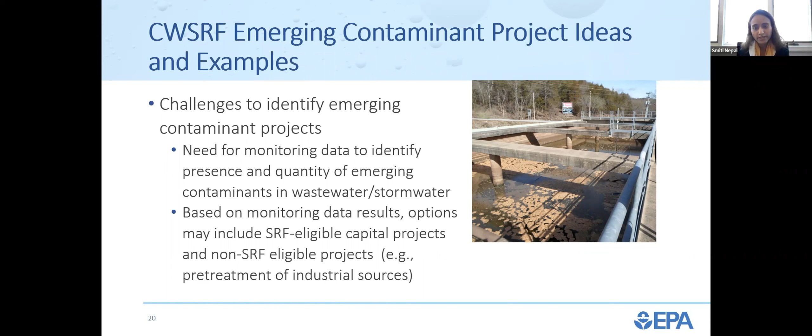The next few slides are meant to provide some practical project ideas and examples in identifying eligible projects for funding. We will also discuss means for addressing current limitations related to monitoring and planning.

Here are some high-level considerations when looking for projects that are Clean Water SRF Emerging Contaminant Fund eligible: monitoring as part of projects for planning and design. For example, your wastewater characterization for POTWs may be eligible.

Consider projects that are already in the pipeline that address emerging contaminants, and look beyond POTW construction and PFAS to stormwater, landfills, and contaminated sites, which can also be a significant source of emerging contaminants.

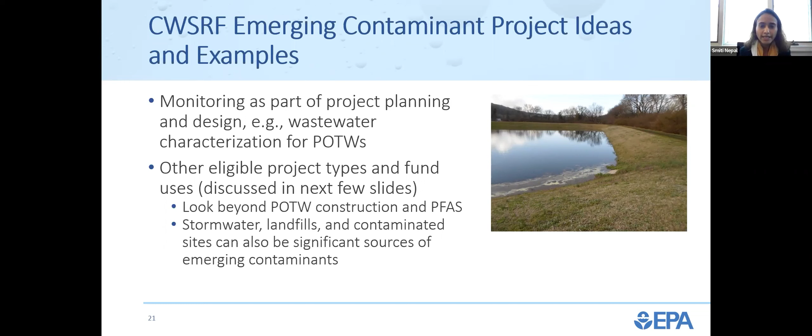Provided that there is a reasonable expectation that the planning will result in a capital project, planning and design and water quality planning, such as your stormwater management plan that results in BMPs, may be eligible. Funding can be used for pre-construction activities to help prepare planning, preliminary engineering, and alternative analysis documents.

Again, monitoring is eligible for the specific purpose of project development. These include the planning, design, and construction mentioned earlier. There are built-in flexibilities when it comes to monitoring for the specific purpose of project development over a reasonable time frame, because we understand the time frame may be different depending on the contaminant you're looking at, the location, or may be affected by seasonal variation.

After the monitoring is completed, the outcomes may be other than a capital project that addresses the emerging contaminants. We won't know until that monitoring is completed.

Another thing to note is that funding may also be used for certain project types to assess effectiveness after construction. An example would be non-point source projects and green infrastructure projects - the startup period to assess effectiveness of the technology may be eligible, and states can determine what is a reasonable startup period.

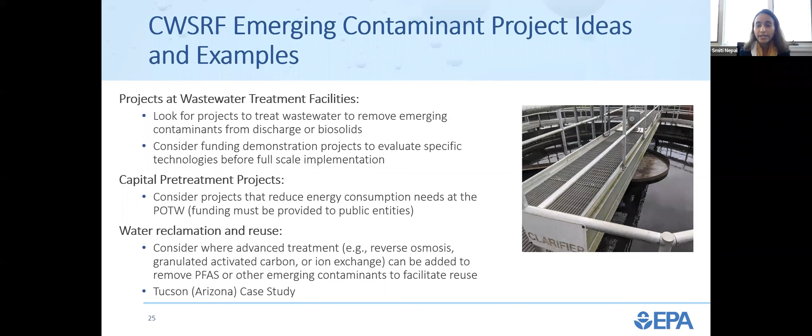Next slide, thank you. Moving away from POTWs, landfill projects may be eligible, especially if they address emerging contaminant runoff. So for example, capping projects that address runoff from the landfill cells, and leachate collection and treatment that will reduce PFAS runoff or load to the POTW.

The emerging contaminant funds are also available for construction of new publicly owned landfills, whether local or regional, or a modification or expansion of existing ones. So for example, adding a dedicated cell for PFAS contaminant waste. We also have an example on this. Beth Malcolm with New Hampshire Department of Environmental Services will be presenting a landfill case study that will be using the EC, Emerging Contaminant Funds.

So we have covered some potential eligible projects in POTWs and landfills, but there is more this fund may be used for, such as brownfields, Superfund sites, and sites of current or former above ground or underground storage tanks. The actual projects may include addressing PFAS through capping, in situ treatment, or removal of contaminated material as part of the implementation of a state non-point source management plan.

Another area to look into is surface water protection and restoration, where there may be projects that address emerging contaminants in water bodies. So for example, these funds may cover equipment for the physical or chemical removal of harmful algal blooms, or HABs. And HABs removal could include strategically placing aeration blowers to remove and control algal blooms, or flocculant-based methods to facilitate algal removal. Next slide, please.

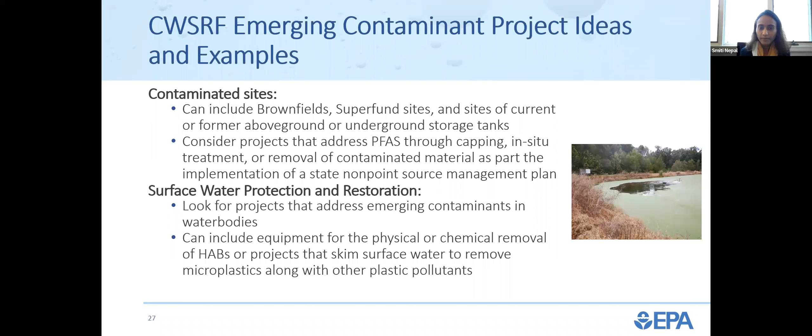Another area that is eligible is non-point source projects. These may be publicly or privately owned, provided that they are capital projects that support the implementation of a current EPA-approved state non-point source management program, or 9-element watershed-based plan established under Section 319 of the Clean Water Act. An example project will be presented by Lori Johnson of Oklahoma Water Resources Board, where she'll be talking about the Lake Thunderbird project.

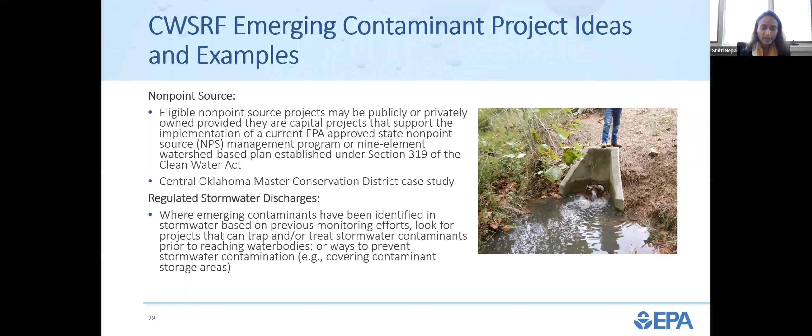And under regulated stormwater discharges, where emerging contaminants have been identified in stormwater based on previous monitoring efforts, look for projects that can trap or treat stormwater contaminants prior to reaching water bodies, or some kind of containment systems, such as covering contaminant storage areas. So this brings us to the next portion of our presentation, where Heather Strathearn will cover the latest research on treatment technologies. Thank you. Heather?

Thank you, Smriti, for sharing that great information on project ideas and examples of eligibility. Like Smriti said, building on these project ideas, we want to share with you all some research on treatment technologies that might be applicable to these projects, particularly demonstration projects. And we're hoping to equip you all with the information and resources necessary to have projects that are successful in addressing these emerging contaminants.

Before I get started, I do want to note that this is preliminary information, and we're focusing today specifically on per- and polyfluoroalkyl substances, known as PFAS, microplastics, as well as pharmaceutical and personal care products, known as PPCPs. We recognize that more information is needed in these areas, and this is in no way exhaustive, and we'll continue to make additional information available.

We also recognize that there's a lot of work being done in this area, so please do reach out to us if you have additional research that you'd like to share. And additionally, there's a great opportunity for pilots that are funded through CWSRF Emerging Contaminants to share information back to EPA regarding their treatment effectiveness, and we'd highly encourage folks to stay connected with us.

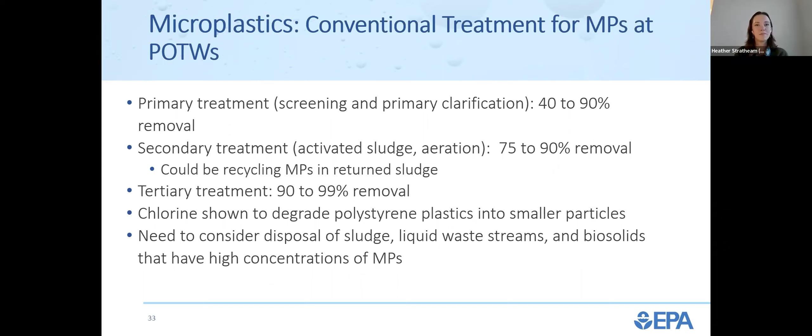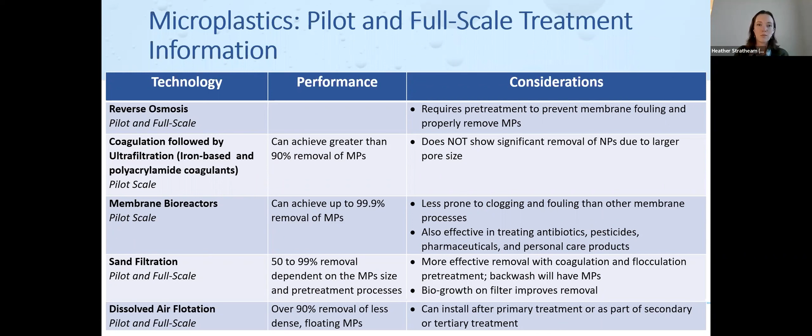This differs from membrane bioreactors in the middle of this slide, which are less prone to fouling than other membrane processes due to the biodegradation of the plastics that's occurring in the biological treatment process prior to the membrane. And so with any treatment process, it's important to consider the waste stream with microplastics and what the ultimate disposal will be. Next slide, please.

Okay, lastly, looking at pharmaceuticals and personal care products, also known as PPCPs, which include all drugs, both prescription and over-the-counter medications, as well as non-medicinal consumer chemicals, such as fragrances and lotions and soaps, and ultraviolet filters and sunscreens. So PPCPs have many pathways and sources to enter into a wastewater system, and testing is really difficult, partially due to the large number of compounds. EPA has developed a method that covers 74 of the compounds.

And another important consideration and area of focused research in PPCPs is the development of antimicrobial resistance, either within the treatment system or being propagated in the environment from antibiotics that are in the effluent.

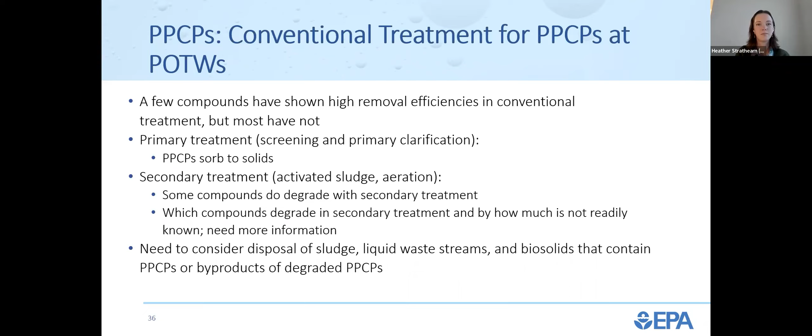And so with any of these treatment processes, it's really important to consider the chemical composition of the free radicals that are created and the remaining PPCPs in the waste stream that's produced and what the ultimate disposal of that waste stream will be.

So I'll conclude just by recognizing that this was a lot of information presented very quickly. So please do go through the linked references and the additional resources for more information. And I'll also emphasize that this is only preliminary information on treatment technologies that might be relevant to you all, particularly for demonstration projects. And the focus of this presentation is on CWSRF emerging contaminant eligibility. So if you have questions about specific technologies, we would love to speak with you offline about that.

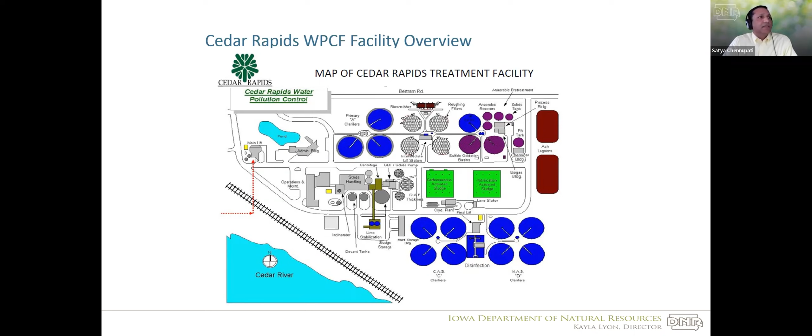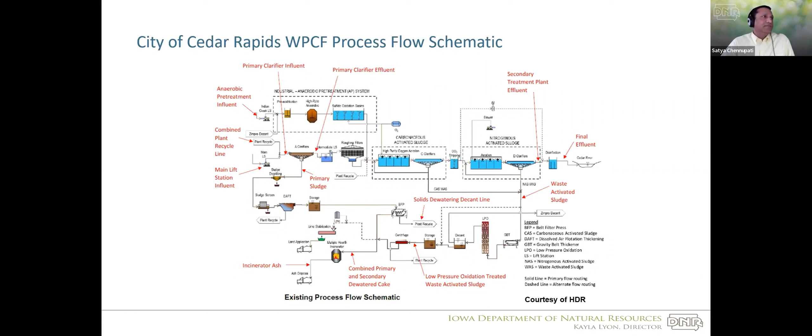And here is just a process flow schematic of the water pollution control facility. I'm not going to dwell too much. It's a little busy there. I just want to point out that incinerator on the lower left-hand corner. That's where the incinerator process is for handling solids. Next slide, please.

So back to the PFAS source and treatability study that is currently underway or going to be underway. The study is divided into 4 separate and discrete tasks. Task 1 is the baseline sampling and analysis of PFAS components. The second is the evaluation of available alternative treatment technologies that are commercially viable for both solid and liquid streams based on the monitoring results. Third is the bench scale and pilot scale testing of a few of these options, to make final recommendations, that is task 4, in a final engineering report with sizing, layouts, and budgets.

So we talked about task 1, the sampling and monitoring and analysis. The first slide here is about the liquid stream. As you can see, they're wanting to monitor the main lift station influent coming in, anaerobic pretreatment influent, primary clarifier influent and effluent, secondary effluent, final effluent, solids dewatering decant lines, and the plant recycle lines.

On the solid sampling, as you can see, the primary sludge, waste activated sludge, and then the low pressure oxidation treated waste activated sludge, the primary and secondary dewatered cakes, that's through the gravity belt thickener and the belt filter press, and the incinerator ash off of the multiple hearth incinerator.

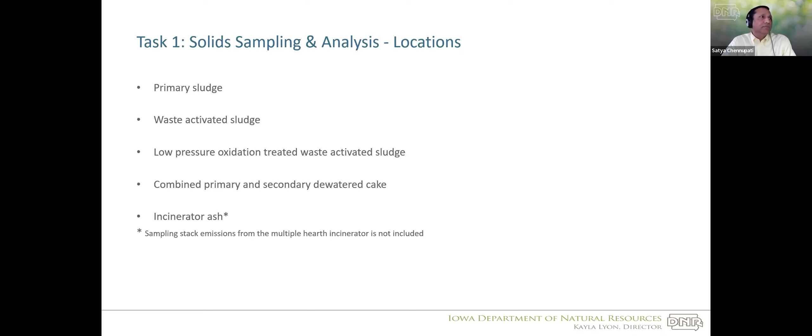So we're talking about the Clean Water SRF project and funding eligibility. Currently the city has requested CWSRF emerging contaminant funds to support this project. Is it Clean Water SRF eligible? Yes, because there is a capital project at the POTW under the section 212 treatment works eligibility and under section 603C1 of the Clean Water Act.

Are emerging contaminants present? Yes, because they are already detected in the EPA research study in the biosolids. Has the capital project been identified? Yes, because the monitoring and pilot projects most likely will result in a capital project to remove and/or eliminate PFAS from the solids and/or the liquid streams.

So where are we at in the entire process steps here? The city has submitted a CWSRF intended use plan application along with a report to the Iowa DNR by December 1st. We are currently processing the IUP applications, scoring, publishing a project priority list, and it'll go through EPA review as well.

And finally, it needs to be approved by our Environmental Protection Commission. We are going to notify the city of Cedar Rapids about the project eligibility for the emerging contaminants funding. Then once the IUP is finalized, we need to apply for the emerging contaminant supplemental grant to EPA, and we need to receive that.

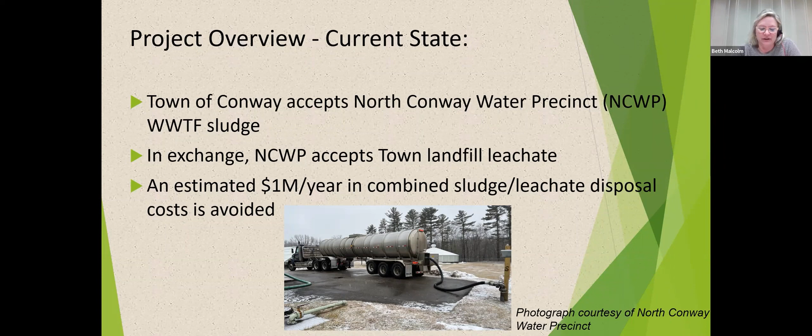So for the project overview, the current state is that the town of Conway landfill accepts the North Conway Water Precinct wastewater treatment facility sludge. In exchange, North Conway Water Precinct accepts town landfill leachate. An estimated $1 million in combined sludge and leachate disposal costs is avoided per year through this partnership. Next slide, please.

The complication is that North Conway Water Precinct's treatment facility is a groundwater discharge facility subject to AGQS standards for emerging contaminants such as PFAS. At least one of the monitoring wells currently exceeds the regulatory limits. And preliminary testing indicates the majority of PFAS loading at the wastewater treatment facility is from the town landfill leachate. Next slide, please.

So the goal of this project is to investigate the feasibility of PFAS treatment options for the landfill leachate stream. They wish to pilot test and select a recommended alternative and then prepare the project for full design, voter approval, and construction. Next slide, please.

So we are currently developing our EC program goals and reviewing the guidance available. We hope some potential recipients were able to join today's webinar, and we are reaching out to wastewater treatment facilities receiving landfill leachate discharge. I'd like to point out that New Hampshire plans to offer Clean Water SRF grants for EC projects. Municipalities will not need the authority to borrow for loans under this program. The typical town meeting vote of the governing body will not be necessary; however, communities will need the authority to accept and expend grant funds.

So coming up in the spring of 2023, we will again request project proposals and make every effort to assist our communities in making good use of the EC funding. And next slide, please.

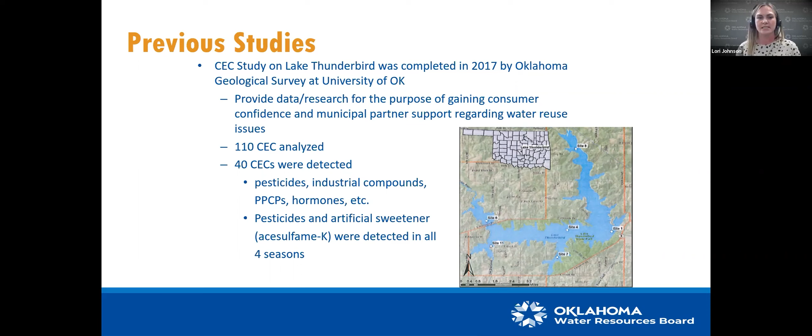And so the report actually made some recommendations for next steps, which actually was further studying to examine the seasonal differences in the detections and concentrations of the emerging contaminants, and to conduct a GIS-based study of potential sources within the watershed. So the proposal that we have for monitoring of the contaminants at Lake Thunderbird does not include a GIS-based study, but it does propose to study the scope and the location of where those contaminants are coming from.

There has already been discussions of a treatment wetland within the watershed to help address some of these contaminants. And so this study will further inform the scope and location of that treatment wetland. So we have not funded this yet. It is in queue to be funded. They're working on doing a request for proposals to find an organization to help with some of this data and research, and we're hoping to fund it this spring.